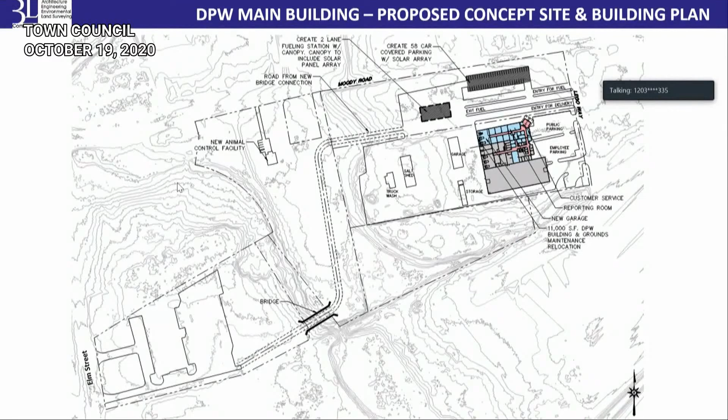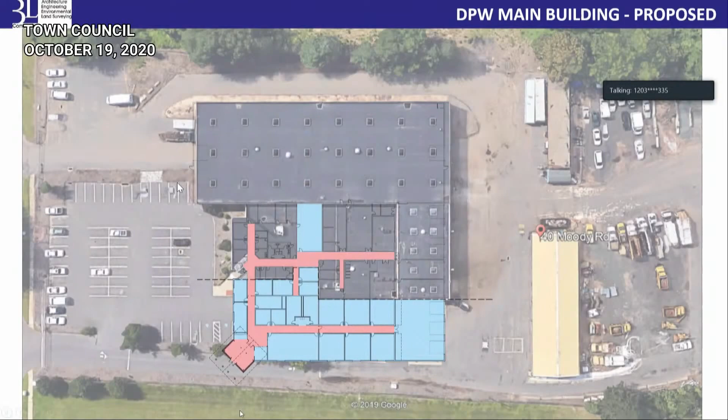So we chose to take this plan further than a typical master plan for a lot of good reasons. One, to start to work out how well this might or might not function, and after all this time we think it functions very well, and so does the committee, and so do the folks at DPW. It's flexible enough that it starts to look at public and private in their town facilities—I use the word private, but service by town staff versus public accessing the building—and allows operations to continue and an addition to be built that would limit the amount of disturbance to the building. We can come back to the details, but we wanted to show you the floor plan and some aspects of it.

As we look at the public accessing this floor plan, there are doors configured here and here. So a large meeting room here, a vestibule with a window reception here. So even though I'm coming to the facility, I may not need to go inside and meet—I may be able to pick up forms, drop off information, pick up information at either window. We're still looking at this floor plan—again, we're not trying to solve it here as a master plan, we're trying to put forth the elements that cause it to work.

Then we have public restrooms and a series of either meeting spaces or offices. The balance is the staff space to keep DPW and buildings and grounds going. We're looking at infilling the courtyard to make a more robust reporting area and service area—everything from a lunchroom to, at times, since operations here go 24/7, serving those needs. During regular hours it would function as a cafeteria and break room, and can also serve as a ready room or on-call room, being large enough in scale.

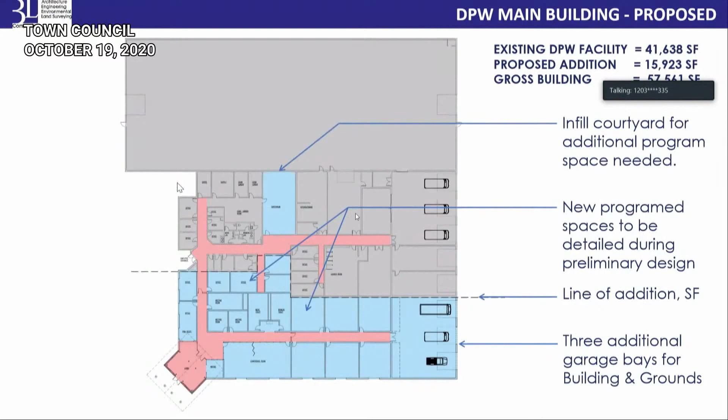So the gross area of the existing facility is about 41,000 square feet. The proposed addition is about 15,000 — that was the program needs of buildings and grounds — bringing this facility up to approximately 57, just under 60,000 square feet. So what could this look like?

Again, we took this particular aspect of it. It's important enough both to the committee and to everyone to look at some of the functional ways that this may work. We've created, you'll see in this view, coming in off of Lego Way, the one-way in fueling.

And one-way out. We still have a one-way delivery drive here. The current DPW Jablonski facility receives material all day long. Vehicles circulate here. It may be as simple as a drop-off, or a lot of the service and activity is around the side of the building at the service bays.

We're going to look a little bit more at the building addition there, but this is the first view of what the potential could be. Again, we're not trying to solve this right now. We're trying to put forth the concepts so that you can see them.

So with that, we're starting to drive down the drive, looking at the new public entry, the fueling facility, above ground tanks, again, as a concept, vehicle parking, town vehicle parking here under the photovoltaic canopy.

As we swing around after we've fueled our vehicle, we go out the exit drive here, and this is also a view of the delivery and service lane here. So with that, I drive on out.

Now, if I'm coming from the public, I would park here in this lot, and there is a new entry with a covering perhaps, and that was the vestibule I described, where I could come in, engage at the window, go through any paperwork, or if I'm waiting, wait for a meeting or wait to be greeted.

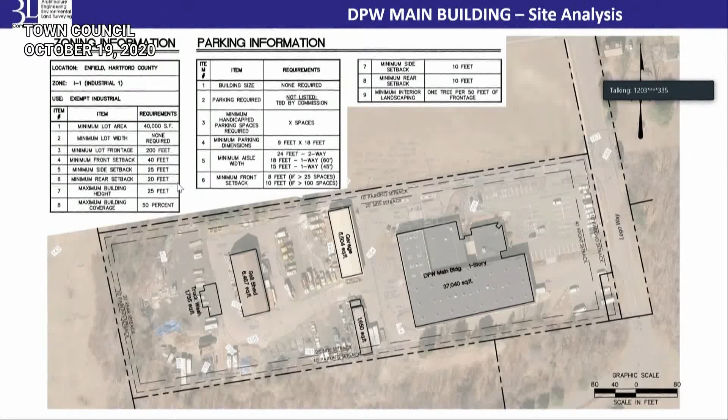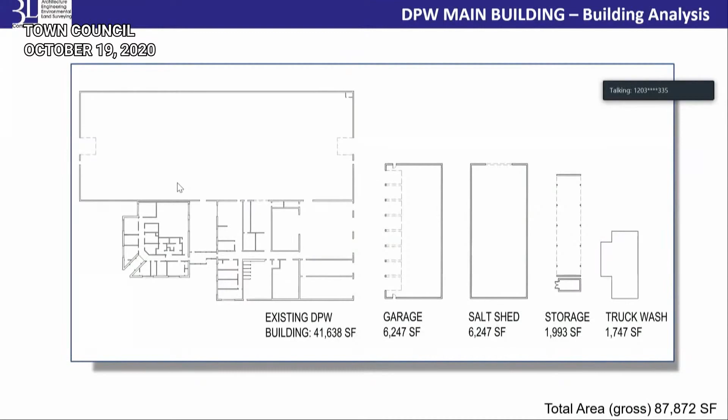Buildings we've put together in terms of square footage, and actually you have these AutoCAD drawings now for your internal use. So what does that look like in a timeline? And after this, I'm going to pause.

So year one, we're recommending that you move forward with consolidating the sites through the planning and zoning approval process. You begin having Buildings and Grounds move in on a temporary basis.

And again, we're going to come back to that facility and see what effect that would have on that property. They would move in here, by the way, and again, we will talk a little bit about the annex. Currently, the shop of Buildings and Grounds is configured over there.

Year one, there is a need to locate the emergency services. That comes due, I believe, next year. So year one would be to move that above ground fueling tank to this site, and then also begin the actual design. We have put forth a conceptual design, but begin the detailed design for the site and for the building. And that is a good, probably about a year process.

Year two would be to finalize the design, the site, and the building, including phasing. I think, again, a lot of thought needs to be given to how to phase this to keep the Jablonski facility in operation 24/7. And then the discussion has been to go to a publicly bid process for construction to a GC.

So in year two, you finalize the design, you construct, and move the animal control facility. And again, we're going to come to that facility later. Year three would be the phase construction, three and four, and we think it's somewhere in the two-year timeline to construct this complex of a renovation and improvement. Year five would be perhaps to connect the emergency services with the central facility and build the roadway. And in year five, begin to look at the master planning for satellite or EMS.

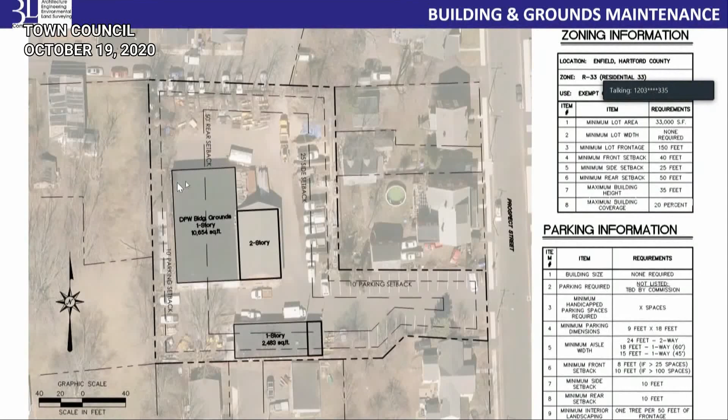And its location makes it challenging to bring people together under one roof. There's some economy to be had there in having all of the town's Buildings and Grounds, maintenance, and DPW under one roof. So again, the building's roughly 10,700 square feet, and if you recall, we're proposing roughly 15,000 square feet to be added to Jablonski.

So that would incorporate this 10,000 plus, what's, I'm going to call it shoehorned in here, really packed into this site. So year one would be to do the inventory and move the folks out and the equipment over to Jablonski and the annex, and then turn this over to the town attorney and to sell this property.

So I think, does it make sense to get on through all the next 8 properties and then open it up? Yeah, I think that makes sense.

Yep, okay. So the annex, the Enfield Annex, as you know, is a large-scale facility, and there have been other studies. We've taken those into consideration. We've looked at options, and we are proposing a new conceptual design to the site and the building to try to fully utilize the building. It, quite frankly, is underutilized right now.

We want to finally review and approve. We're going to put a concept out there this evening, and we've been working with the facilities committee. That is a change, quite frankly, and change is a challenge. So we're going to look to review and approve that concept.

The building still needs to be formally programmed. By that, we mean each and every use and how it would fit, both in there and proposed. And the town needs to go through a process to define and operate office space. There have been discussions of potential rental, and we're not going to try to solve that in the master plan.

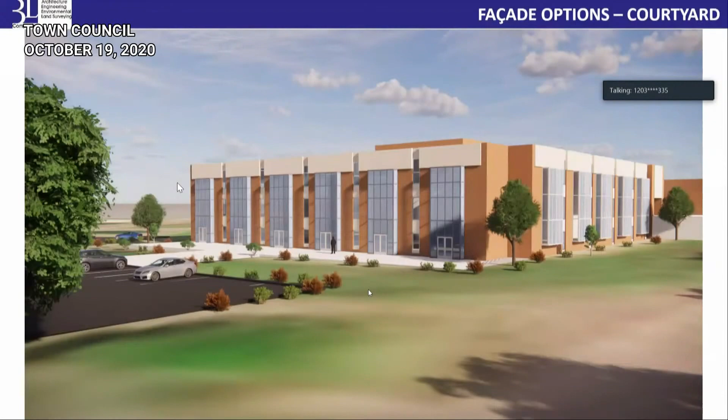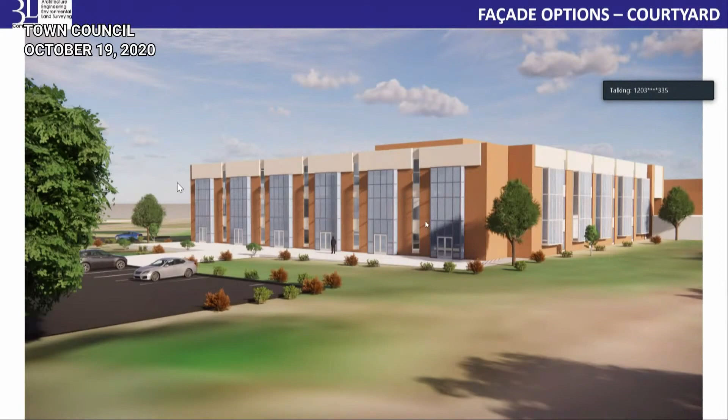So what does that look like? We chose to again put forth a design concept here. And again, we're not trying to solve it, but we are conscious of this building having a fairly deep core to depth ratio. So what do I mean by that? When I'm standing in the middle of this building, I can't see daylight. And so the idea here is that if you know the building, and we'll see it in aerial view, there are sections that already have very narrow, high clerestory windows, and then it doesn't involve the rest of the building structure. So it's looking at taking that section out and introducing glazing.

So that's the concept. Again, enough space out front. We're not trying to design it at this time. We're trying to say this could in fact become a newer entry to the building off of Moody Road. So that's the end we're looking at, and we're going to look at that in plan. But that's the concept that's put forth.

So here potentially is what an office space could look like in there when you remove that section of windows. So this is to scale. This is a concept that could become a reality if you so choose.

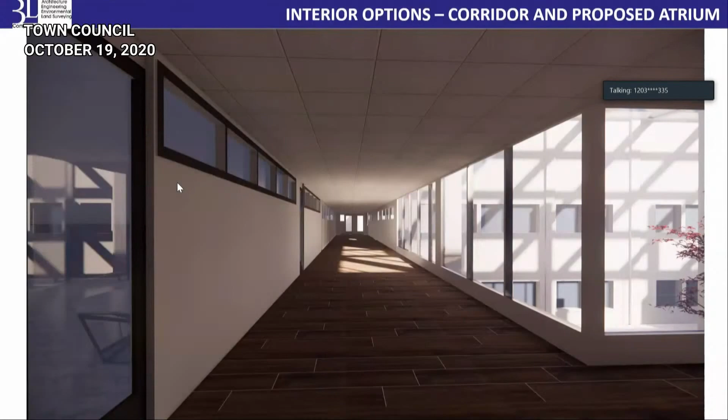We would then look to borrow daylight from the interior, and here's where probably the most radical part of this concept comes. We're proposing to create an atrium where the library space currently is, that's skylit from above, that allows daylight in. And so as you can see, and I'm going to toggle back to that office, but this is what I meant by the core. Right now, there is no daylight here.

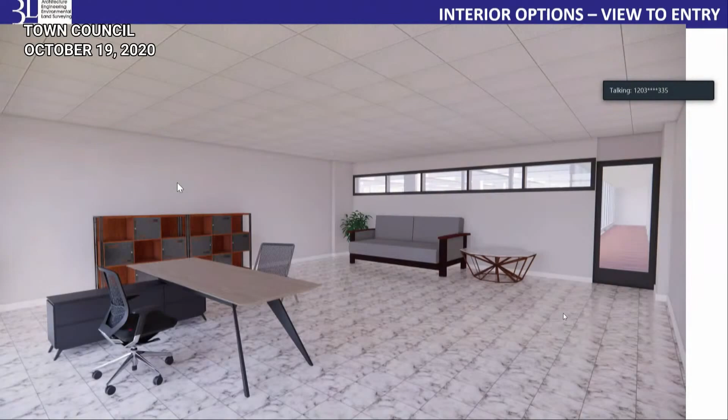And so if I'm, oops, I went the wrong way, I apologize. If I'm in the office looking out with these clerestory windows, I can start to see daylight in these offices. And so that concept is accomplished by opening the middle of this building up and shortening the depth to the core and creating an inner courtyard here, or a walkway, sorry, to this courtyard. So we put that concept forth.

Site's a beautiful site, very well organized, great for sports. As you know, it functions very well as a high school. But it can't really return for school use without a substantial investment. So in bringing it up to current school standards, it can certainly function for athletics, and certainly for limited use, but to return it fully to a school, those days are gone.

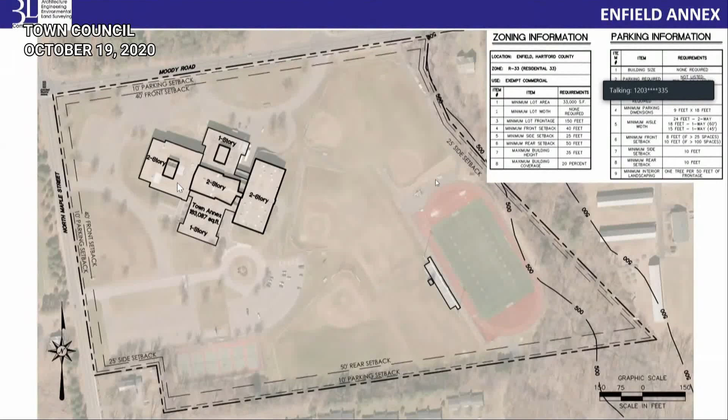But continue to use the athletic fields, continue to use the building. Again, well planned, well laid out, with room for expansion here and a new entry possibly here. And we'll see that in the floor plans.

So the building gross area is 210,000 square feet on 3 levels, and the current uses of the 210 are laid out here. We won't try to go through them all this evening, but you have a section of adult education, which we nicknamed Board of Ed. It really should say that it is public schools and their use by the rec department, CNA, Buzz Robotics, B&G Electrical.

There is a large area in green not really in use, some file storage, admin, and building support. So in our diagrams, we're starting to gray out areas that are building support, stairs, elevators, etc., and we're starting to call out circulation as a separate number. So you're really looking at the usable space.

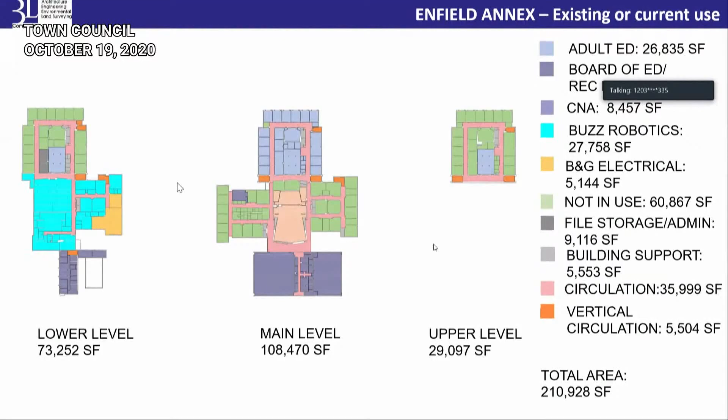So we took that into consideration, and here's what is proposed. There's an intentional dashed line across here, and this is the office space section of the building. There's enough space to keep everything that's there now, add the town hall record storage to this lower level here in the former varsity locker rooms, still keep all functions, and create this office space in this section of the building on 3 floors.

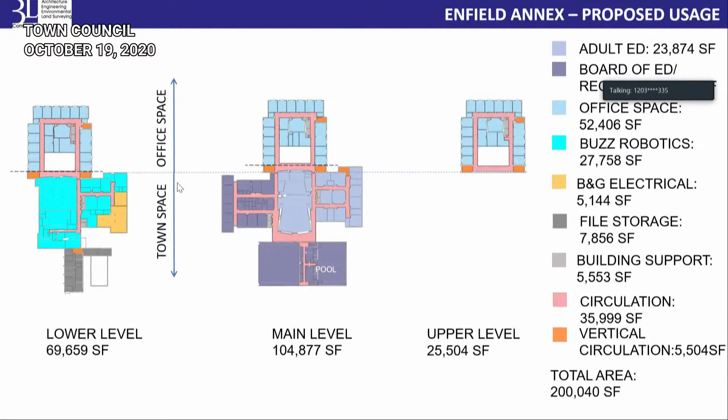So that's what's proposed. This was not taken lightly by the facilities committee. There is a lot of debate, and I'm sure there'll continue to be a lot of debate about how best to use this building. But we believe that there will always be a need for some form of office space, whether it's used by the town or used by the quasi-town functions, and that the idea of returning it to a strict educational program is not a good idea. So the recommendation there is for the office space.

Year 1, we recommend that the town hall document retention be firmed up and planned and designed. You would start then in year 1 looking at any kind of formal agreement or the use and policy of these offices. Again, we're not going to try to solve that in this master plan. Move Parks and Rec to free up some space at Lamagna, and then move some of buildings and grounds to the Enfield Annex.

Year 2, construct that document retention. By the way, it is intentionally on the ground floor. It is near a loading area. It would facilitate the movement out of the town hall attic, we're going to see it in a minute, to a ground floor location, which will make it much easier on document retention handling. And then perhaps in year 3 and 4, construct and restack the building. So that's the Enfield Annex.

Next, we move to the Thomas Alcorn building, and this also former school is a great building on a great site. We think it can be used more efficiently, and want to encourage the use of a more detailed program for town and Enfield public schools. I think the functions that are narrowed down can coexist and work well together. As I said, the staff to square foot area suggests that utilization is fairly low, and we'll look at that, and the cafeteria right now is probably one of the easiest areas to configure into office space.

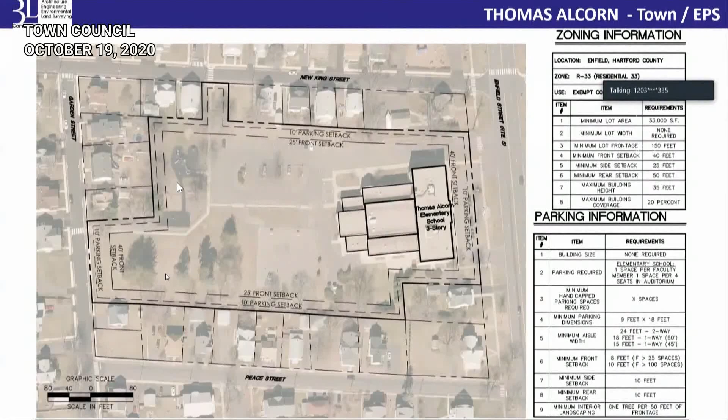So here is the aerial view. It's configured on roughly 3 floors, a lot of good open space. There is currently a look at how best to utilize the basketball courts, how much parking is needed, and we'll see in the next slide there is space here available. We're not trying to solve it, just pointing out there's a lot of good open space. This building is a good neighbor to the residential area. It does allow for expansion. It can grow on this site, has good access, and good potential for expansion as you plan out over time.

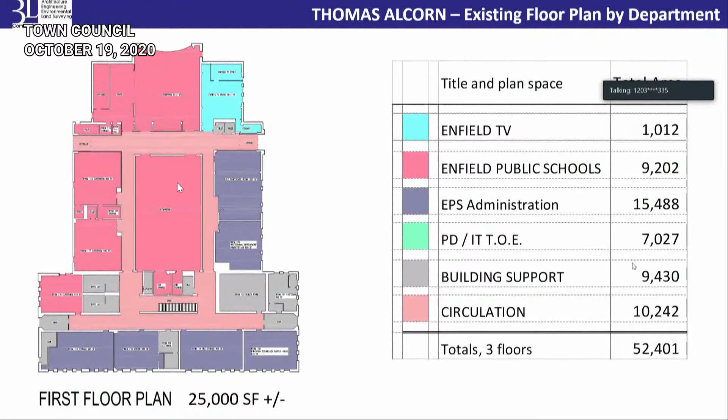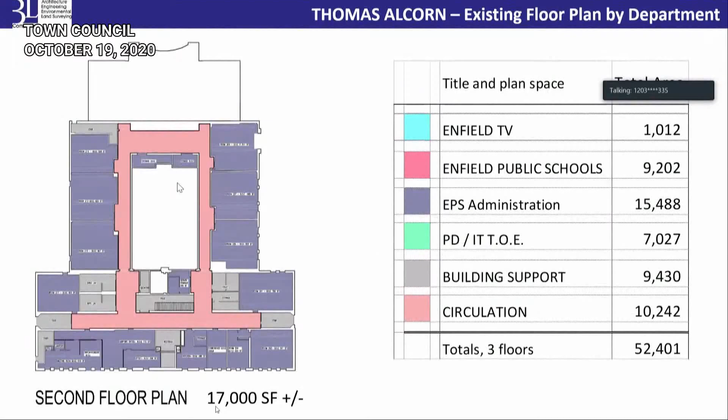So the building configures here, it's roughly 53,000 square feet, broken down like this. About half of the space is on the first floor, 25,000 square feet. Enfield TV is here, about 1,000 square feet. Then public schools and public administration, you'll see in these next 3 slides, is in the salmon or red color, and the blue is the administration, and on the upper floor is PD. We do separate out the building support, stairs, mechanical spaces and circulation. So these are the numbers for usable space in the total building of 52,000. On the second floor, the floor plan gets a little more constrained, 17,000 open space here, and on the third floor is entirely PD and IT for the town.

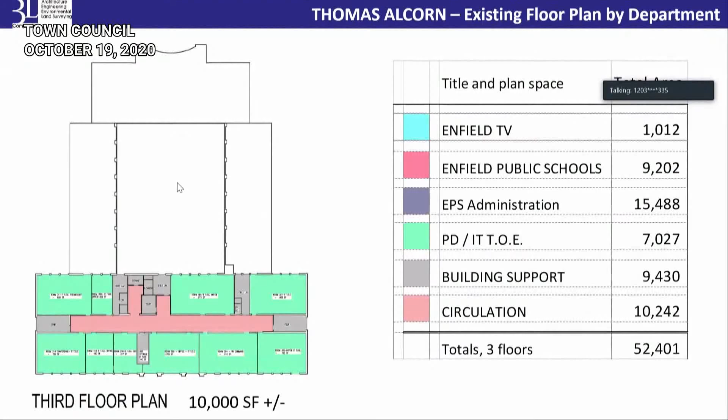So what do I mean by utilization? One way to look at it is to take the usable space, and again it's a gross usable number, so it's large, and divide it by the number of people using it. It's a little on the generous side, roughly 1,000 square feet is the average per person. A lot of that is understandable, and let me explain for a couple of reasons. One, of course, IT and the police department, and the technical aspect of IT, does not lend itself well to being compact. It is the reuse of a school.

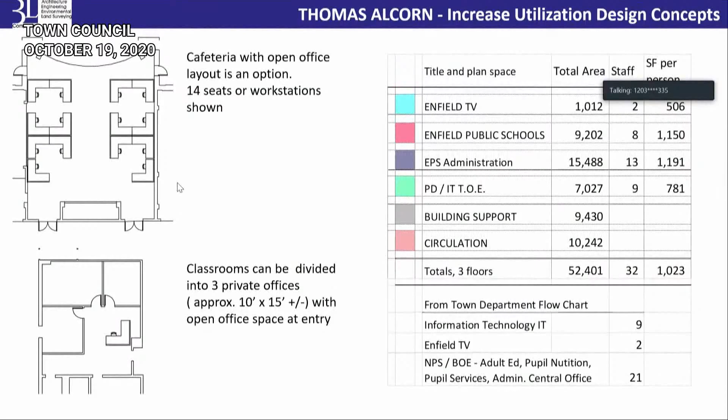So on the left you'll see a concept: you can take classrooms and configure them into 3 offices, or take a cafeteria and configure it into open office space, thereby increasing the population. Again, we're not trying to solve it, our charge was to find effective ways of utilizing the buildings. We think this is a great building and can be enhanced. The utilization can only get better from here. So year 1 is to look at social services, what could move there and what could co-locate well, and in years 2 through 5 is to identify additional programs and the growth of this facility, because again, great location, great building, great site.

So next we move to social services. Our recommendation is to ultimately close this facility and sell it. To do that, there are a number of things that need to be looked at: what of these functions can go to Thomas Alcorn, what can move to the Lamagna Center. Yes, we are aware of other projects there at the center of town. We haven't been directly involved with them, but we are quite aware, and there may be an opportunity to move some social services there and keep them. The committee was very strong about the idea of keeping social services in the center of town, even though this site is looked to be sold. So we're not selling social services, I want to be clear on that. We're selling the site and retaining social services, looking at the best way to locate them within the town.

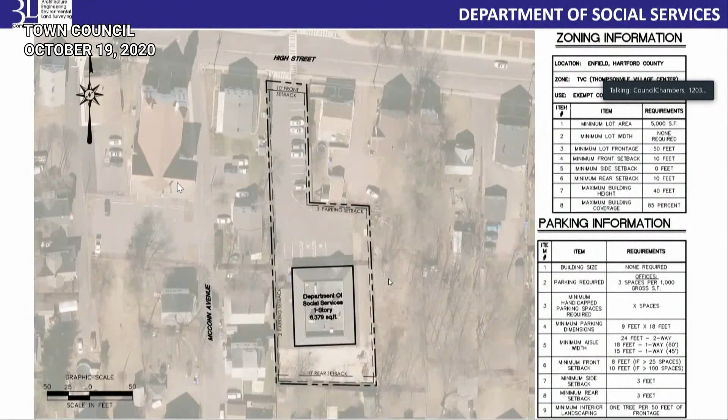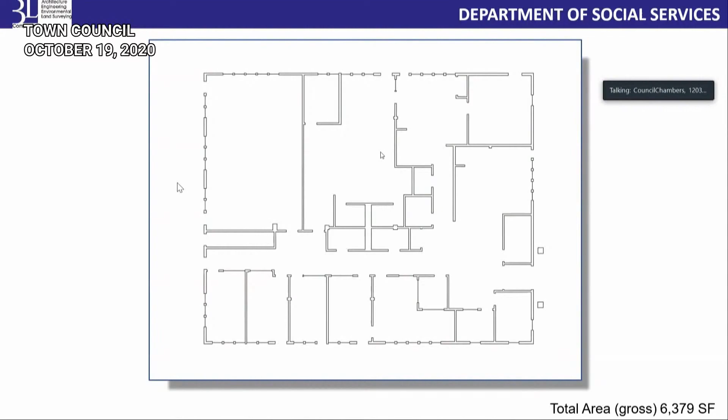So here is the aerial view of the building. Again, good building in great shape. It is somewhat on its own, if you will - it's there at the center of town, but as you can see, it's next to the church in a residential neighborhood, set back. We think it's a fairly saleable property. It's 6,000 square feet, was built well and functions well. Again, the charge was to look at optimizing the use of all the town property, and this one could be sold and not miss a beat in utilization.

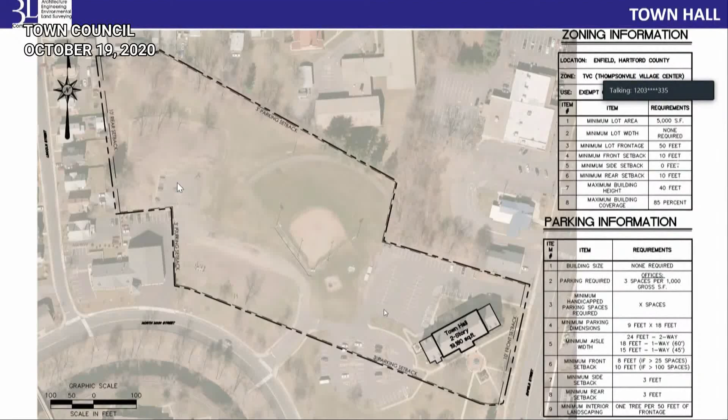Great building, we all know it works well. No real change needed there. Yes, we're aware of other potential connections and projects, but no need to change anything here. It's really about document retention and migrating that to the Enfield Annex.

Next, animal control. I think the biggest reason to move this is finding it, quite frankly. It's not that accessible for the public. That, and it's in a small scale building, and it's another opportunity to close a functioning facility that you're paying to operate. Again, bring that function up to the central facility.

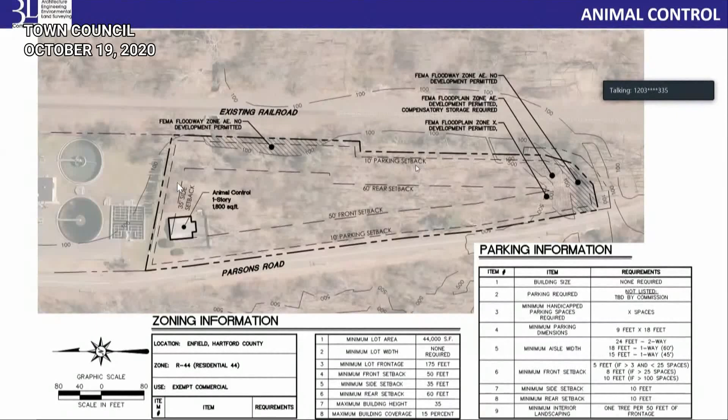So here it is down on Parsons next to the river, and there is the site. It could combine with wastewater treatment. It is a site that is zoned residential, believe it or not, down in that zone. I think it exists by special exception. But again, we're looking to close this property.

The timeline would be to begin to look at that right away, plan it, and construct it on the newly consolidated site. By year 2, we believe you'll have the central facility properties consolidated.

So public safety, again, functions well, great location. There is a mandate through an agreement they've entered into for an operational vehicle that should be covered. So we think the most effective way to do that is an unconditioned, pre-engineered metal building covering over this.

You could certainly put a temporary covering, but I think it's clear that emergency and police operations are always going to have command vehicles that need to be covered and should remain there next to their facility. Putting a modest, unconditioned covering, not heated or cooled, preserves the long-term use of that vehicle.

We talked about interconnection, and then the underground fuel tanks moving above ground and up to the central facility. Those are the projects necessary to move that along. The drive, by the way, is aligned here, and our civil engineers have looked at the alignment of that drive and the topography and crossing the wetlands.

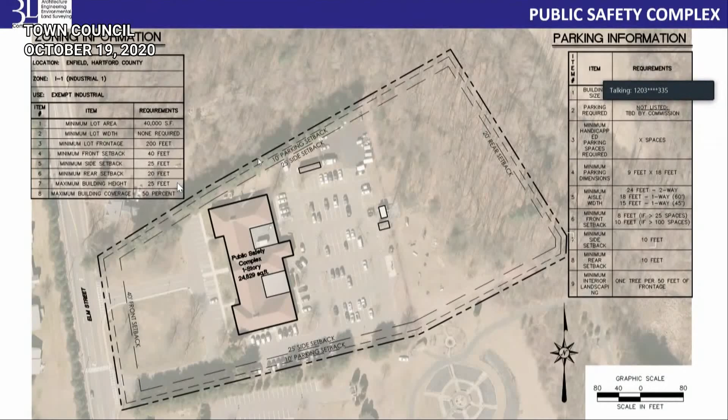So that's what the facility looks like, working our way across the wetlands here and interconnecting. The building works well, doesn't need much. The object here was not to study police functions in this building, it was to study the overall site and the combinations of the site. Like any public safety complex, there's always a need to look at it long-term for functional use, and we didn't dive into that under this master plan.

25,000 square foot facility. The timeline is to plan next year to move those tanks from below ground to above ground, plan that pre-engineered building, and then construct it. Then perhaps in year 5, connect this site with the Jablonski site.

Emergency medical services - we looked quite closely at this, and it's not a site we recommend expanding on. You'll see it's very constrained. It also has a history, and there have been traffic studies, so additional traffic is not recommended at this site. Could it be a good satellite site? Yes.

Could it be the central site? Possibly, with the same vehicle count. So now you have options - moving this to central, or this becomes satellite, or satellite at the central facility. So here is emergency medical services.

Again, it uses every inch of this site. It's unfortunately not directly aligned with this intersection, and I think that's one of the concerns with traffic at this intersection as well. It's combined, by the way, on one greater site, so it's not an easy equation to look at. It's kind of over the setbacks, and again, we don't recommend expanding there.

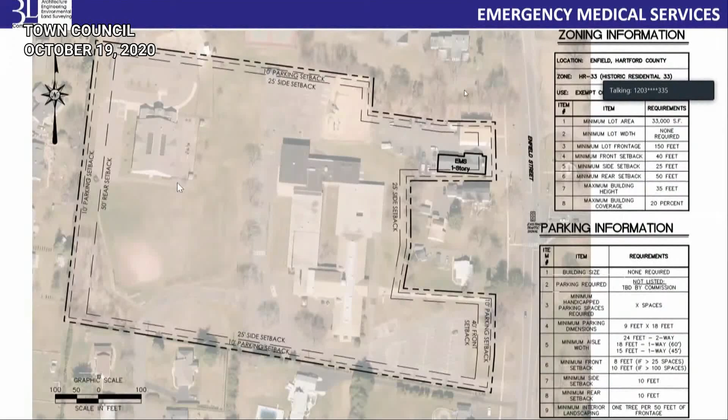However, it can remain and function well. It's a beautiful streetscape, and the building functions well as it stands today - about 4,000 square feet. You probably need more in the long term. So that's what this is about - beginning in the near future to do a detailed study of emergency medical services townwide.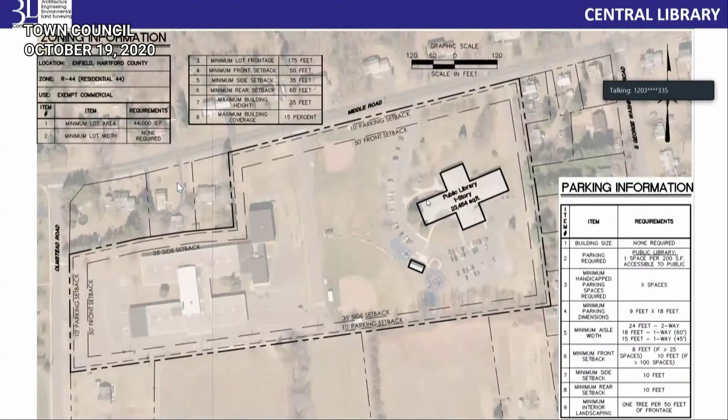Last, and I don't mean least, is Central Library. Here again, you've got a great facility that functions well, and we really think that should continue. Take a look at identifying what the library needs, what the community needs, and what the town needs at Central Library. In these current times, it's great to have a building that's functional and can be an alternate location for use. There is some ability for a little bit of expansion out here in the front yard on Middle Road. It's well used, great building, well maintained, does have a little bit of space in the lower level.

Egress is always a challenge from the lower level. Egress, and by that I mean access and accessibility, stairs, so on and so forth. But again, you've got a great building here that has a total of just under 40,000 square feet, so we recommend that it remains.